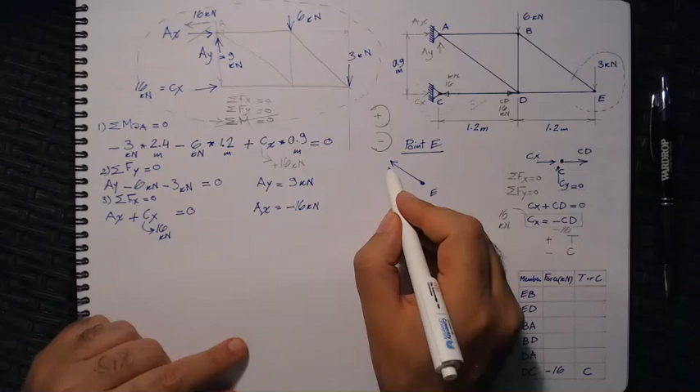And the first force was EB. Because I intersected this member, I'm going to replace it with a force in the same direction as member BE. So something like this. Do I assume it going away from E or into E? If it's a new force, in order for tension to be positive, I will assume that the force is tension, away from E. So I will put this direction here, and we'll call this force BE or EB. It's pretty much the same. So let's call it force BE.

All right. Are we done with the free body diagram? It's still not closed. So you continue the dotted line. You will hit another force, ED or DE. So I will put one force in the same direction of the member, and I will assume it tension as well. I will call this DE. And don't forget the external load. The external load was going downward, 3 kilonewton.

All right. Is the free body diagram done? Well, if I end where I started, now everything inside the dotted line is in equilibrium. And this is the free body diagram of joint E. So joint E is in equilibrium, meaning that these two conditions apply: the summation of forces in X equals 0, and the summation of forces in Y equals 0. Something we've learned, when you find a force with an angle, it's very easy to get the two components of this force. So this will require us to get the angle.

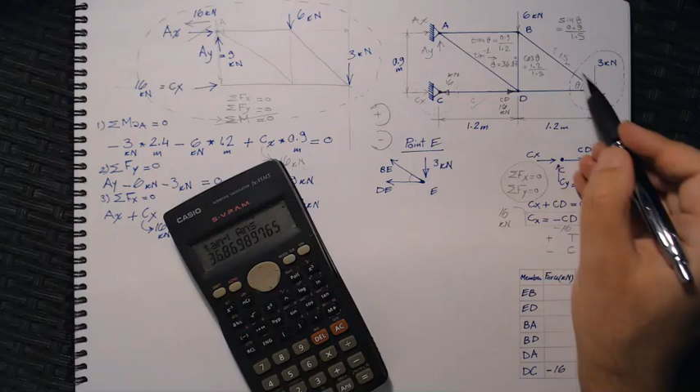This means that theta is 36.87 degrees. So you don't have to do all these steps. You either do the tan and figure out the actual angle and then get the sine and cosine because we will need it here, or you can get the geometry and have the exact numbers.

So let's check the cosine. I'm just gonna save this as A, so cosine A, it's 0.8. Cosine theta is 0.8, and if you divide 1.2 by 1.5, it's actually 0.8. So this is correct. Sine theta, I will just get sine of the number I got. It says 0.6. If you divide 0.9 by 1.5, it's 0.6. You don't have to waste a lot of time here, but I just wanted to show you that the numbers work and whatever you choose will work with you.

So if this is theta, I will get the two components of BE. What's the direction of the vertical component of BE? It's going upward like this. So I'm going to put it in a dotted line. And if you go away from this angle, it's sine. So this is going to be BE sine theta. And the horizontal component here, because you're going close to the angle, it's cosine. C is C: cosine is close. So BE cosine theta. All right.

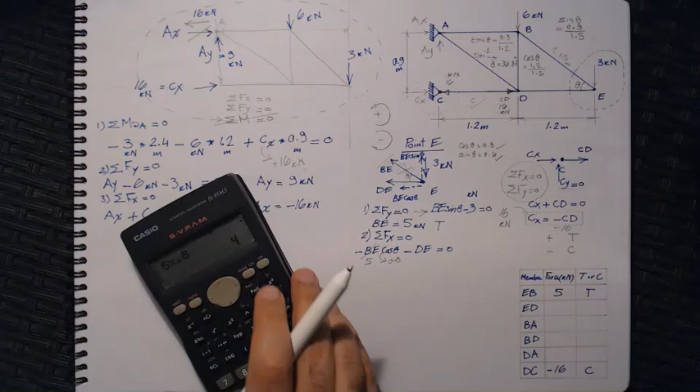The good news is we know that BE is actually 5, so it's going in the negative x. We know that cosine theta is 0.8. So when you do the math, I will just quickly do the math: 5 times 0.8 equals 4. And this will leave us with DE equals negative 4 kilonewton. So this will go here, becomes positive, and this will leave this negative.

So what does it mean that DE is negative 4? It means it's compression. So I'm gonna go here, DE or ED, because the force at both ends, the force here equals the force here, equals the force at any point in the member. There's actually one force in the member, so you can call the member whatever you want, DE or ED. So DE is negative 4. What's the units here? Well, I put it up there. It's kilonewton. So remember to do that.

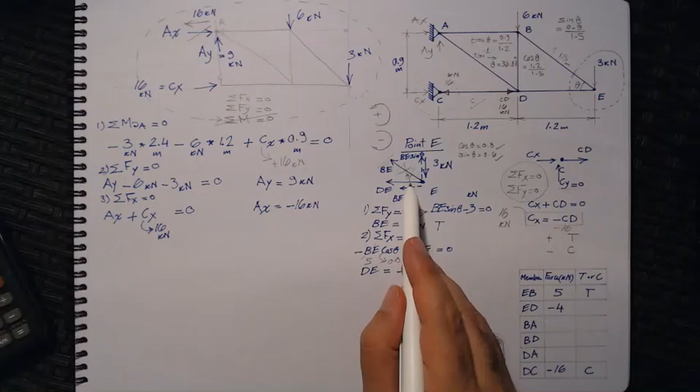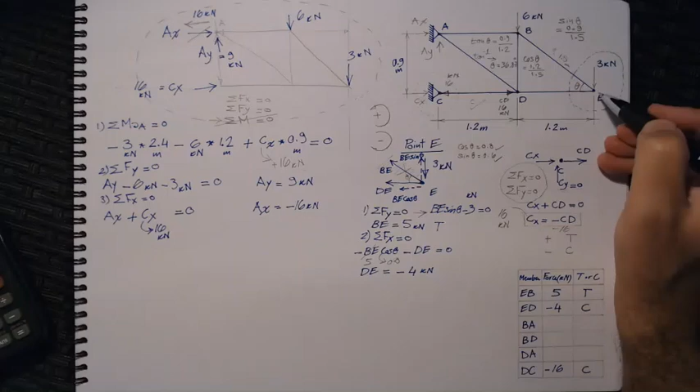And is ED tension or compression? Because the assumption of tension turned out to be incorrect, it's actually negative, so that means it's compression. So I'm going to put this as compression. That's very important. So very quickly, I just want to show you what is the correct direction of forces at joint E. EB turned out to be tension, so the direction of tension is away from the joint. And DE or ED turned out to be compression, so the correct direction is into the joint.

There you go. So before I forget, I'm just going to take EB as tension on E, and I want to put the correct direction of the force at B. So I know BE is tension. What is the direction of tension on B? How do you do that? Well, now consider B. Put your finger on B and observe what the tension direction is like. Tension is pulling away from B. So this is the direction of the tension force on B.

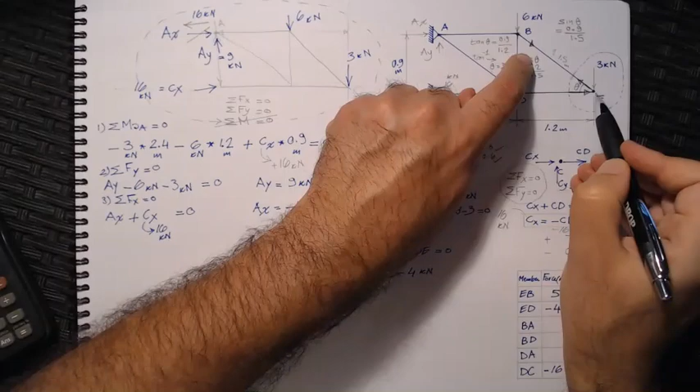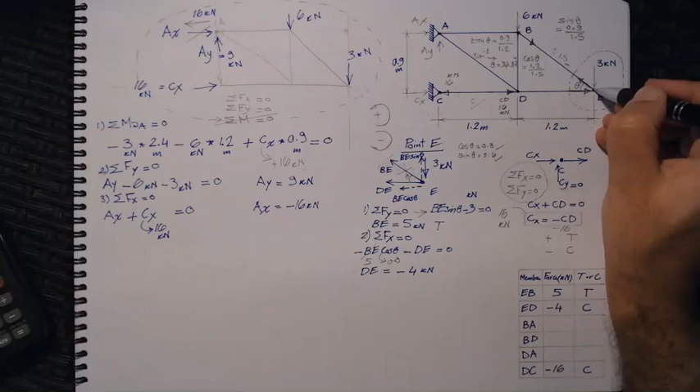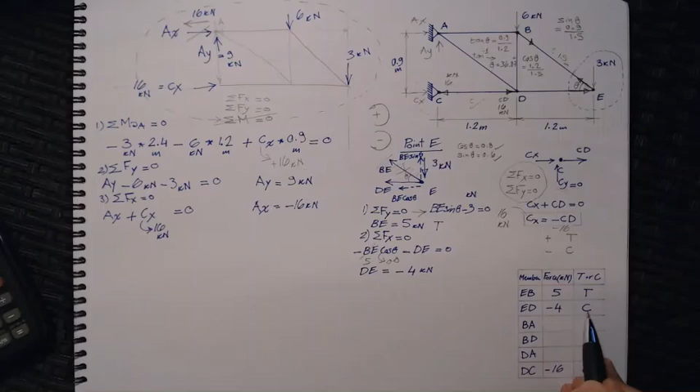So look at this. The force on joint E is pulling away from E, and the force in the opposite direction is actually equal and opposite. It's pulling away from B as well. There is tension everywhere. There is tension on E from this end, and there's tension on B from the other end. Same thing with the force DE or ED. The force here is compression because DE turned out to be compression. So it's causing compression on E, and it's causing compression on D as well. So this is the correct direction of the force.

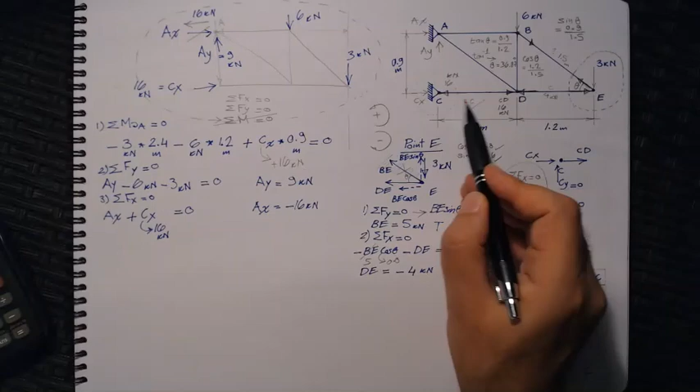This force is 4 kilonewton compression. You don't have to note it on the diagram. I normally will just look here, but for your calculations you can note it as well. All right, so we know BE, we know DE, we also know DC. So that leaves us with 3 more joints to go.